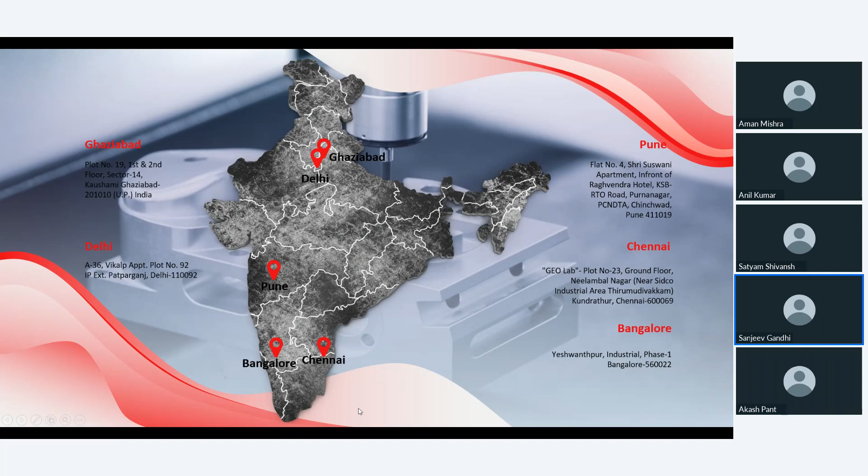Satyam, go next. Like all of you, most of you are present in various cities. Geoinformatics is also present in multiple cities. Our head office is in Ghaziabad. Our legal office is in Delhi for all the legal paperwork. We are located in Pune, Chennai, Bangalore, and Hyderabad. And of course, we also have an office in Jamshedpur.

When we say Geoinformatics, the word geo we have taken from geometry. You all somehow or the other are linked with geometry. Some of you are linked with robo applications, some with material handling, some with machine building. Most of you know geometry or are involved with geometry. Our organization is heavily involved with inspection, reverse engineering, and automation using laser profilers.

Whatever we are doing in our country, we are doing in collaboration with our foreign partners. Today, for the next full hour, we are spending the entire time talking only about a product from LMI Technology. In fact, my team member Peter from Canada is also present in this webinar, and he will assist us in between, answering some of your questions if we can't. Go next.

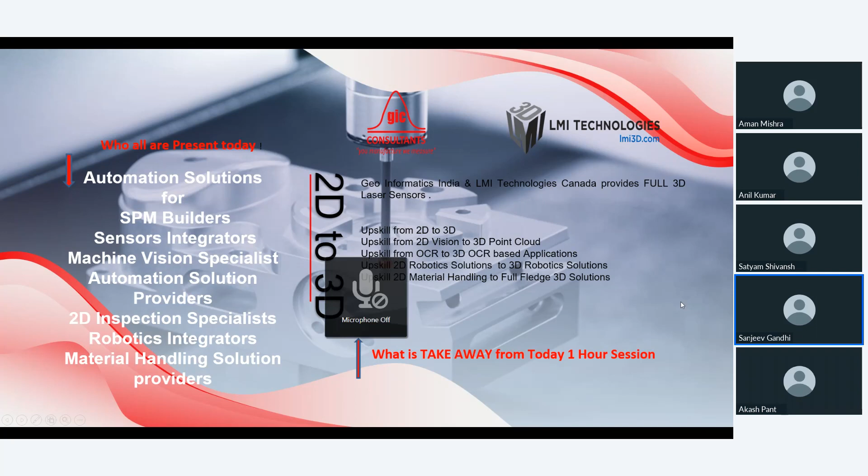What are the takeaways from this one hour session? Just in short, today we want to upskill all of us, including us, from 2D to 3D. You guys know 2D very well. After this one hour, I am very sure we will be talking a lot on 3D - whether it's vision, OCR, robotic handling applications, or material handling applications. Cameras, which are very common and most of you are familiar with, can handle some applications. For example, you can do OCR every day, but how about 3D OCR? Having OCR with depth can be done with the help of sensors. How about material handling, where not only the volume calculation is done, but also the numbers are counted, and whether the total number of parts are there or not can be calculated by 3D sensors. So today, after one hour, I guess we will be on the same page, migrating from 2D to 3D.

Once again, all my next slides are courtesy of LMI. LMI Technology is a Canadian company. We'll be showing you a 5 minute video immediately after that, which introduces you to the complete LMI solutions as a product line, as a solution provider. And Geoinformatics is one of the partners of LMI Technology.

So we'll be presenting about LMI Technologies. This is the story of LMI Technologies, the global leader in 3D scanning and inspection. LMI is a company of passionate, innovative, and dedicated machine vision professionals whose factory-smart 3D sensors and supporting technologies enable the measurement of shape for inline scanning, measurement, and inspection in a wide range of manufacturing applications. Based out of our headquarters and manufacturing hub in Burnaby, British Columbia, Canada, we have 13 regional offices in 8 different countries and an extensive network of valued partners. We bring more than 40 years of experience in the vision industry, over 100 patents, and 420 employees, with 100% focus on developing the industry's leading smart 3D solutions.

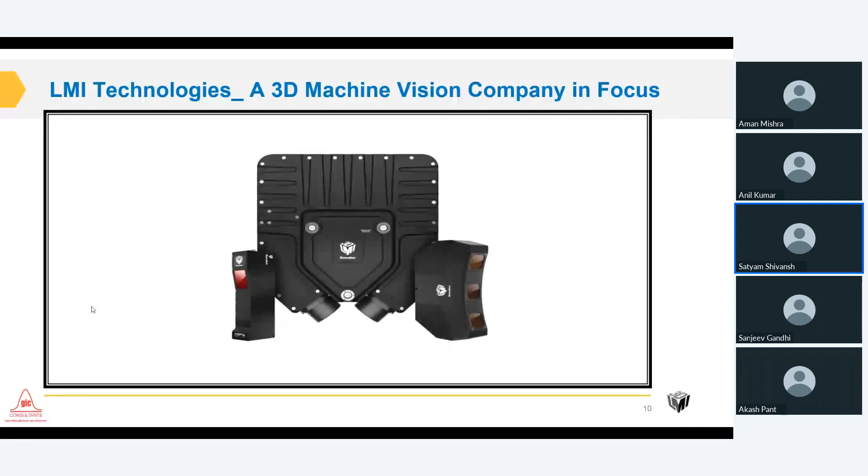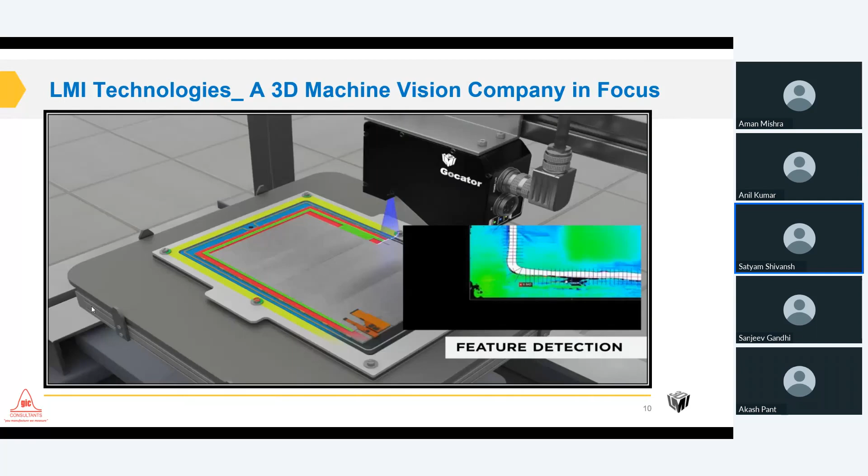Our flagship product is the award-winning Gocator 3D Smart Sensor lineup, which consists of 3 primary technology types: laser triangulation, structured light or fringe projection, and line chromatic confocal imaging. Gocators are not just sensors, they are complete factory-calibrated inspection systems with the ability to make decisions on device and send that information to downstream equipment or databases. Just one 3D Smart sensor can scan, measure, and output volume measurement, detect defects, detect anomalies, detect irregularity, 3D shape inspection, product detection, edge detection, feature position detection, feature detection, orientation detection, height measurement, plane angle measurement, surface roughness, flatness, segmentation, classification, intensity grade, diameter, area, width, length, radius, character reading, presence, absence, and more.

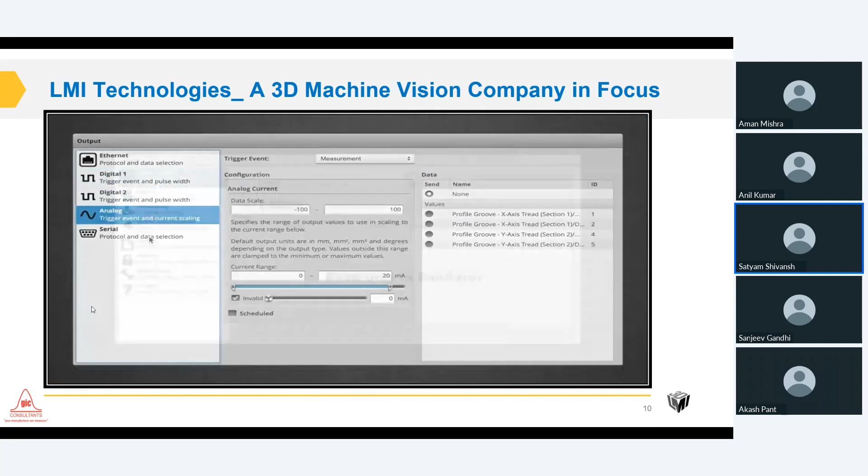All Gocators have a user configurable IP address. Simply type it into a web browser and you can access the device's 160 plus onboard tools, data filters, settings, and everything else you need to quickly get your application running. This no extra cost, built-in functionality makes setup time extremely short. An application that might take days to get running with competing sensors takes only hours with Gocator.

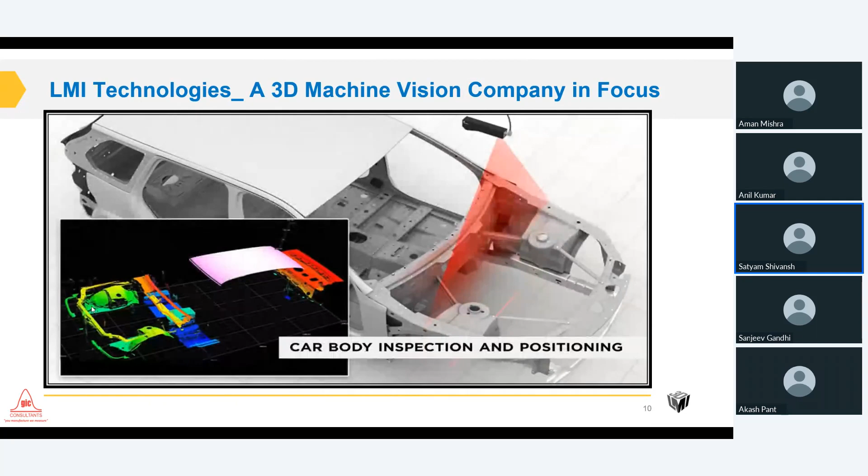LMI offers a wide selection of sensors to fit a wide range of applications. Our Gocator 2600 sensors generate 4,200 points per profile and achieve X resolutions up to 2.5 micrometers for detecting tiny defects in precision manufactured parts. Our 2490 has a 2-meter wide field of view, making it a one-of-a-kind sensor for applications like car body inspection or wide conveyor belt scanning. Our G3 snapshot sensors are relied on for all types of vision

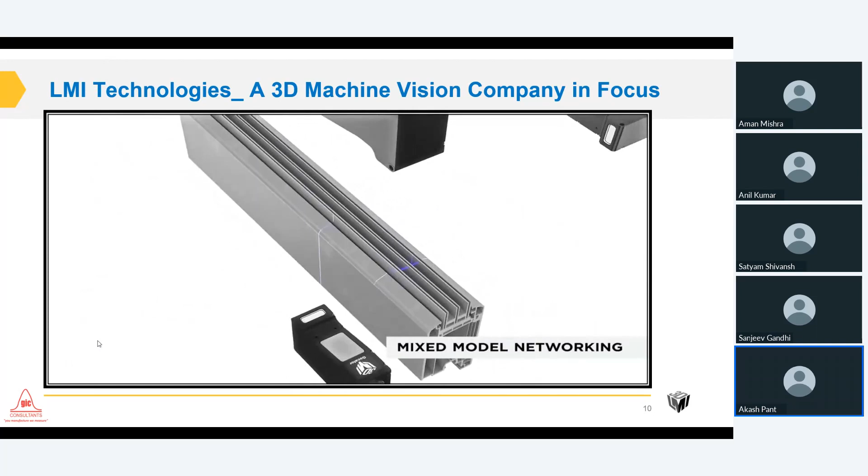Degree scan of a cylinder, it is audible now.

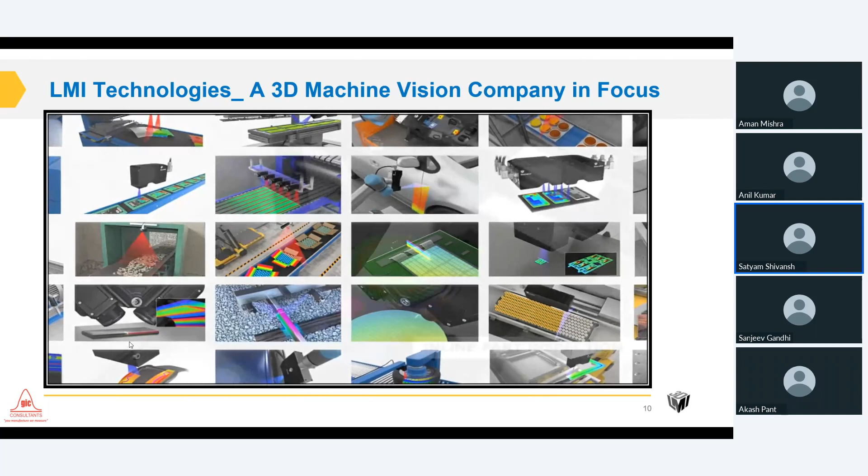LMI's technical team is exceptional at providing reliable and fast customer support. We even offer live training workshops to get you familiarized with Gocator's onboard tools and user interface. With easy robot integration, a comprehensive SDK for advanced users, sensor inspection rates that reach up to 10 kilohertz for line profiler and up to 16 kilohertz for line confocal sensors, and best-in-class performance on challenging materials, LMI has built Gocators to be as smart, flexible, and simple to use as possible. These smart sensor benefits introduce 3D inspection into many manufacturing applications, including inline part inspection, parcel dimensioning, food process optimization, robotic pick and place, EV battery inspection, tire sidewall and tread inspection, road and rail inspection, wood scanning and optimization, semiconductor wafer inspection, multi-layered cell phone glass inspection, and more.

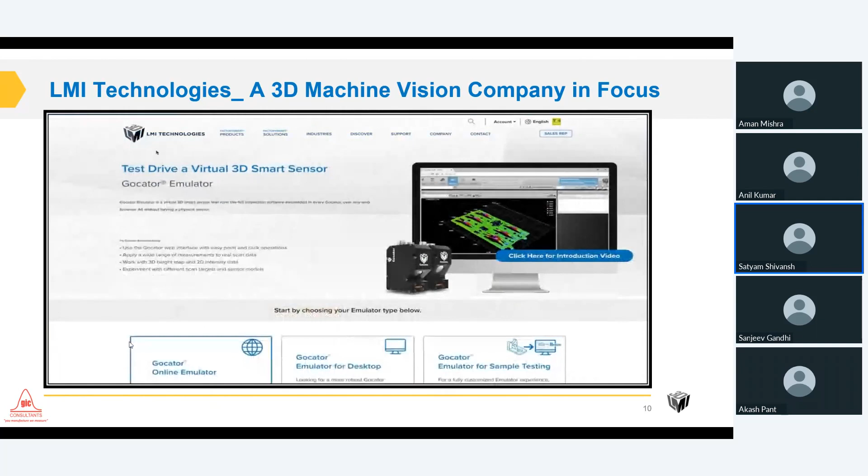And now with our Factory Smart AI Solutions service, customers can get a turnkey solution to deploy the added power of deep learning-based image inspection to their production processes. If you would like to learn more about LMI Technologies or how Gocator can be used for your application, feel free to reach out to us through the Contacts tab at lmi3d.com.

Satyam? Yeah, this is... So as we saw, all this was about LMI Technologies. So we sell LMI through us. We are providing 3D laser profilers or 3D smart sensors.

So first, I would like to talk about how these 3D sensors are much better than 2D vision cameras or 2D measurement systems. So let us compare. When we talk about a 2D measurement system or 2D vision systems, they are not calibrated, they are not pre-calibrated sensors. You cannot simply take the camera out and use it for any kind of measurement related application without doing the calibration. These 3D sensors, however, are pre-calibrated sensors and are ready to use right out of the box.

When we use 2D measurement systems, broadly implemented, we are either using PC-based systems where we use industrial cameras with their own software for doing inspections, or some of the smart cameras also out there. Some of the techniques used for inspection and measurement are pattern matching, edge detection, blob analysis, and a variety of other tools developed by vendors.

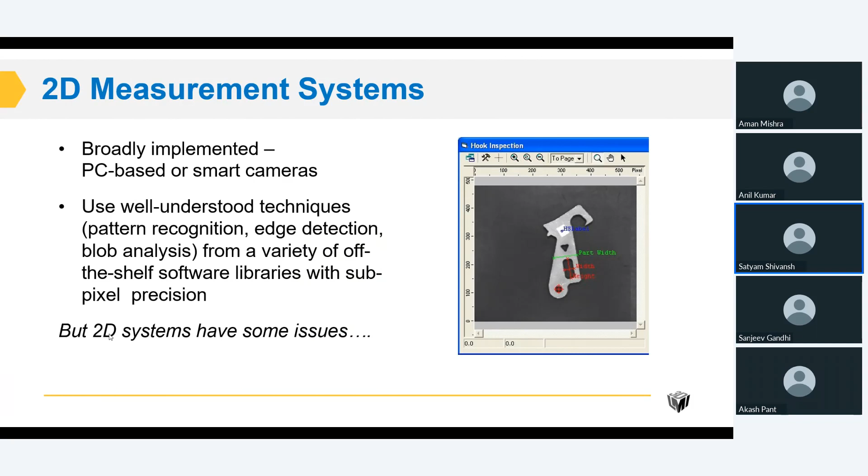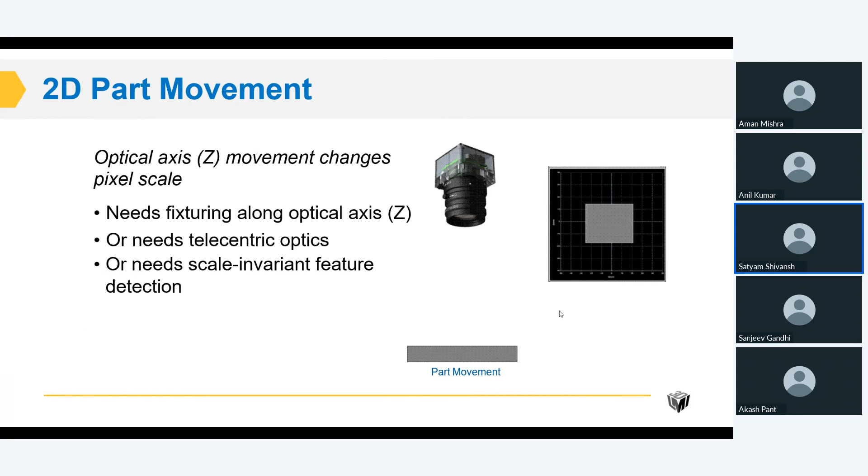Going to the next point, part movement. If there's any height variation in the part, up to a certain level you can easily compensate with the camera. But if the height changes dramatically, you have to use either a telecentric lens or move the camera up and down. To overcome this, with the help of 3D sensors, this issue is entirely removed.

A 3D sensor is calibrated throughout the volume, having its own measurement volume, or measurement range. As far as the part is underneath the measurement range, which is very large compared to 2D vision systems, that doesn't affect anything - we don't have to move the sensor up and down or anywhere. We can simply put any part anywhere within the sensor's measurement volume and measure it. For targeting precision, we can use calibrated targets to easily optimize it.

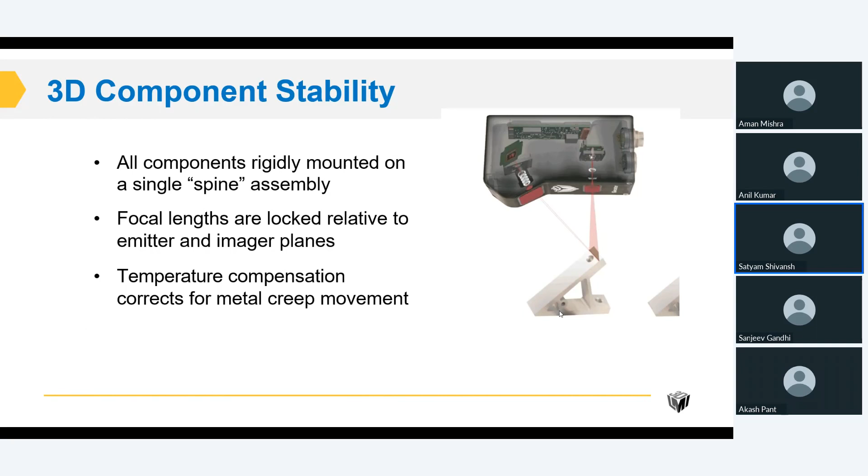Talking about stability: with 2D vision systems, any instability of the component, like vibrations and temperature changes, affects the vision cameras. With 3D sensors, all components are rigidly mounted in the single spine of the sensor itself. Focal lengths are locked, so no changes occur in the imager and emitter planes. Temperature compensation and metal creep movements are also handled up to a certain level inside 3D systems.

So how are these 3D sensors much better than 2D vision cameras? We get rich data acquisition - we're talking about point cloud data, which we get throughout the laser. As a result, we're able to get shape features, object flatness, volume, and we can measure surface angle. All these things we're able to measure with 3D sensors.

Talking about measurement stability, these 3D sensors are much more stable when doing measurements. This is because the focal lengths are fixed, as we saw earlier, temperature compensation is present, and correcting movements with the help of a scan target at start allow us to compensate. These sensors are much more repeatable compared to 2D vision cameras in measurements. Since the object location from the sensors is automatically compensated, the objects can move anywhere within the field of view of the sensor and still result in the same result.

For example, let's say the part is above a certain height threshold from the conveyor system, like 5mm or 10mm, and at that time we scan a particular height and get 5.5mm, suppose. After a certain point, if the conveyor belt has shifted a little bit, like 1mm or 2mm, even then the result will remain the same. It will not affect the measurement or the repeatability.

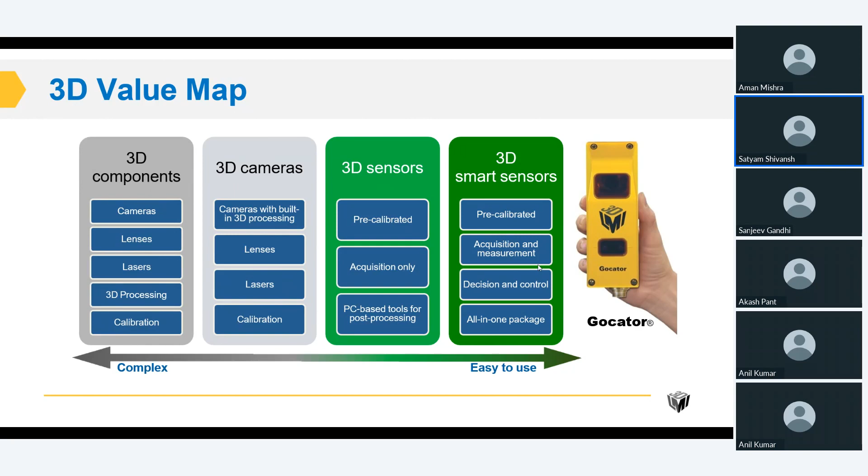So talking more about the 3D technologies, how we do this 3D scanning and inspection. The 3D smart sensors are an all-in-one package that can do the 3D scanning, the measurement, and the pass and fail decision, all with the sensor.

Our smart sensor is for inline 100% scanning inspection across a broad range of markets, from small field of view to large field of views. With these sensors, we can achieve automation, optimization of quality control, and deliver Industry 4.0 data directly to a learning system as well.

Now we are talking about the Gocator. It's the same idea: scanning, measurement, and control for material optimization at high speed during the production process.

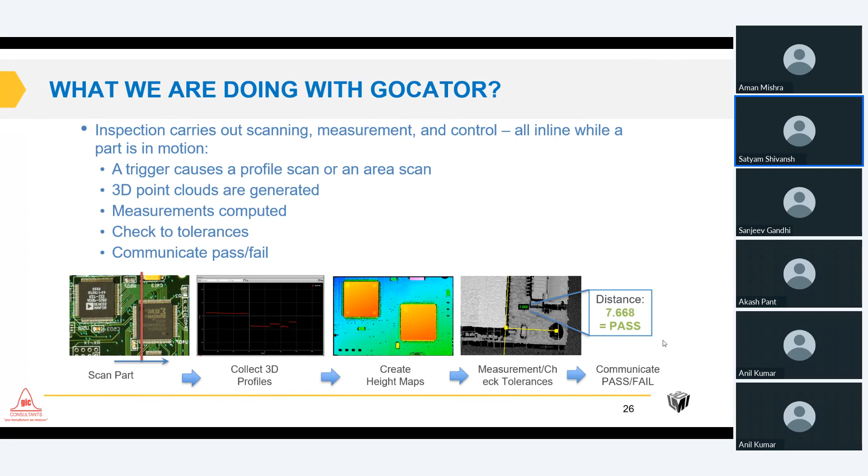We call them 3D height maps, and on these you can easily do measurements, and enter tolerance values, like the tolerance limit shown here at 7.668. Based on that, it will pass, and the sensor will communicate the pass and fail results directly to your controller, robot, or ejection system. On the basis of that simple trigger, you can reject or accept a particular part and give an alarm too.

Towards 100% quality control -- previously, factories were doing offline article inspection, taking a part to a standard room for inspection, which was a time-consuming process. Then we moved to random part inspection, taking some random parts directly from the conveyor production line to do the inspection.

Now, talking about 100% part inspection, any part coming on a conveyor can be inspected for critical dimensions, any kind of linear dimension you want to measure -- the sensors are easily able to do that linear dimension inspection.

So I will just play a video on why we should choose the Gocator sensor.

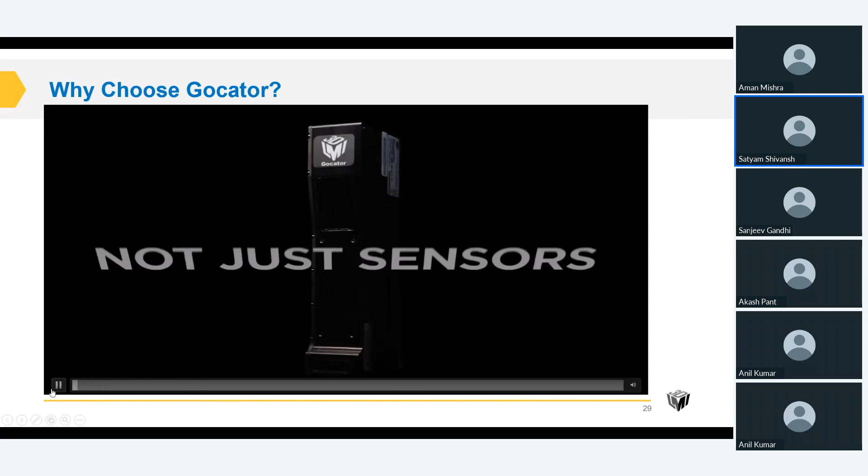Gocators are not just sensors. They are complete factory-calibrated inspection systems with the ability to make decisions on device and send that information to downstream equipment or databases. Just one 3D sensor can scan, measure, and output product volume, defects, anomalies, irregularities, 3D shape data, edge detection, feature position, height, radius, orientation, plane angle, surface roughness, flatness, segmentation, classification, intensity grade, diameter, area, width, length, character reading, presence, absence, and more.

All Gocators have a default IP address. Type it into a web browser and access the device's 150 plus onboard tools, data filters, settings, and everything else you need to quickly get your application up and running. This no extra cost built-in functionality makes setup time extremely short. An application that might take days to get running with a competing sensor takes only hours with Gocator.

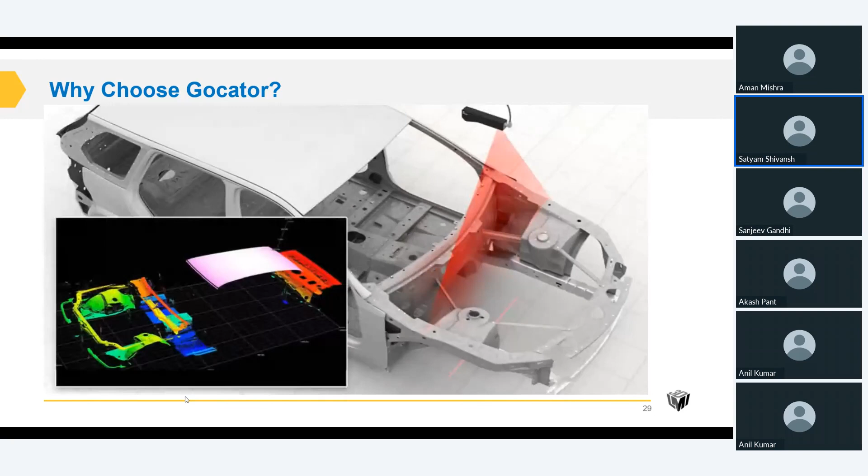LMI has a wide range of sensors to fit a wide range of applications. Our 2490, for example, has a 6.5 feet wide field of view, making it a one-of-a-kind sensor for applications like car body inspection or wide belt scanning. Our smallest field of view sensors can find tiny defects in electronics, even multiple layers of a camera lens assembly.

With our G5 technology and over 40 years of experience building three-dimensional sensors, LMI's technical team is exceptional at providing reliable and fast customer support. We even offer free live training workshops to get you familiarized with our onboard tools and user interface.

Sometimes our customers need more resolution or a more complete view of an object for their application. Multiple Gocator sensors can easily be linked together to create a wide scan area or provide a more detailed view of an object. Gocator software makes this easy. Just select the sensor layout you are using, set up an aligning tool, and the software does all the rest of the work so that you can quickly start making metrology-grade measurements.

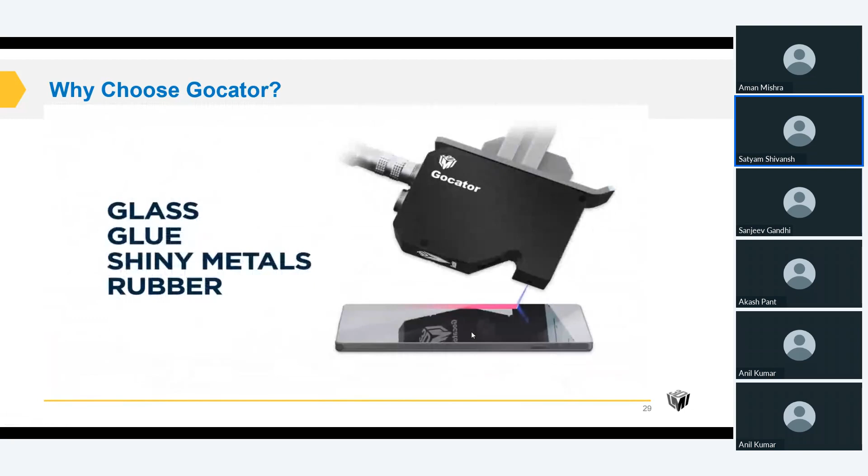With easy robot integration, a comprehensive SDK for advanced users, sensor inspection rates that reach up to 10 kilohertz, and best-in-class performance on challenging materials, LMI has built Gocators to be as useful and simple to use as possible.

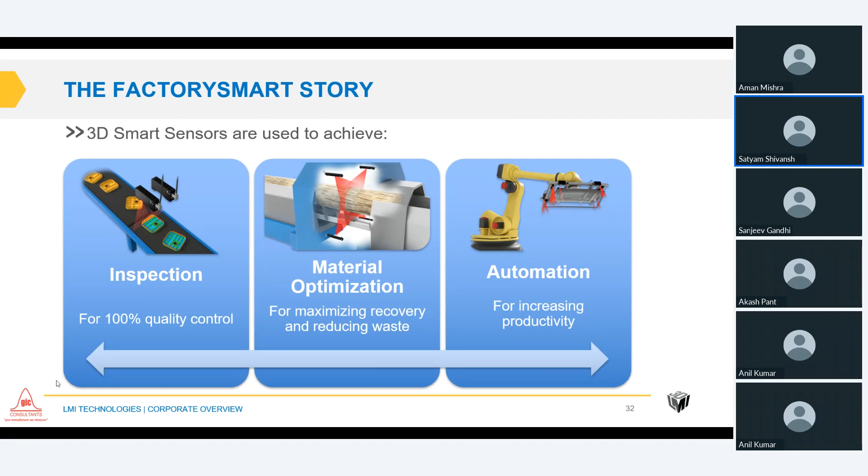So you can simply connect. All about Factory Smart means you can simply connect it anywhere and talk to any kind of system. It's easily scalable. You can easily mold the Gocator sensors' inbuilt tools to any kind of application up to your liking, and it is smart. It can make its decision on its own.

So this is the same scanning of the parts, giving you the results. You can see here the dimensions are being measured, and according to that, the alarm is being generated.

This is material optimization, scanning of the part, giving the coordinates to a cutter, cutting it in equally divided shape sizes. And the last is automation, guiding of the robots for this. This is a roof placement kind of application for these kind of applications.

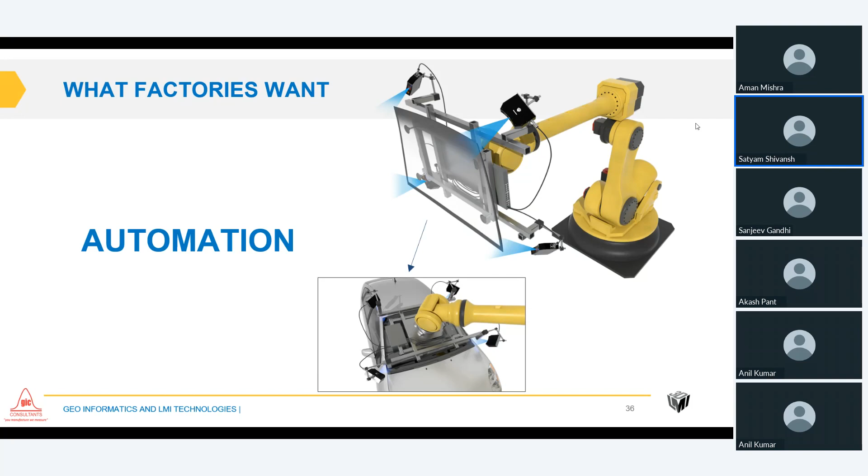So with the Gocator sensors we have two kinds of technologies on which the sensor is working. The first is laser triangulation technology, in which any part can be moved in a running condition and the sensor is able to scan it completely on the top surface and generate a 3D point cloud data. The second is structured light technology, where the part comes, stops for a moment, the sensor takes a snap, and we get a 3D point cloud data generated.

As you can see, this is how the sensor operates. The parts move underneath the sensor, and the sensor scans it and generates a 3D laser profile.

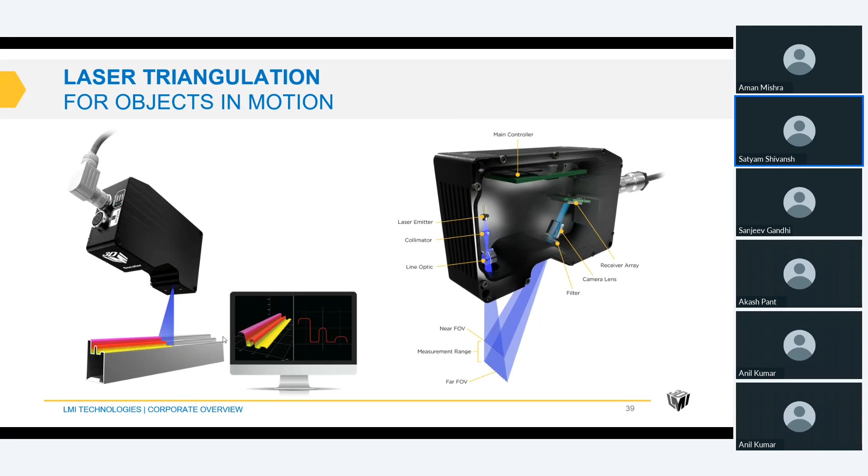So the Gocator sensor is more than just a sensor. The sensor acquires the 2D data, that is the intensity image, as well along with the 3D data acquisition. It does the measurement also. It does the control. It has all the controlling features of the sensor built inside, and the tools are customizable according to the application. And this is all in a web-based interface.

So we are having three categories of sensors. One is a point, one is a line, and one is a snapshot. So this video will explain what all the categories are there and how they are being used.

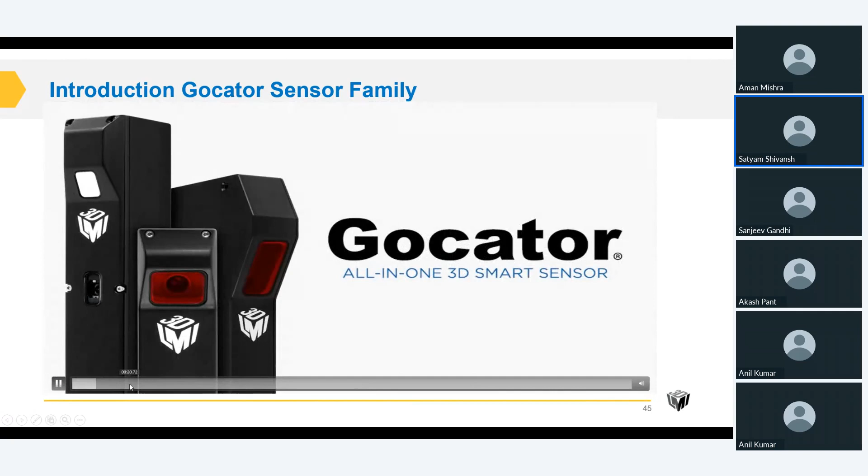Presenting Gocator from LMI Technologies. Our Gocator all-in-one 3D smart sensors are trusted worldwide for automated inline inspection and material optimization. As all-in-one solutions, Gocator smart sensors combine 3D scanning, measurement, and control in a single device.

Advanced web technologies deliver a powerful user interface to any web browser with no external PCs or controllers required. This makes Gocator easy to integrate into existing inspection systems, therefore minimizing system costs and maximizing product quality and throughput by automatically executing pass-fail controls.

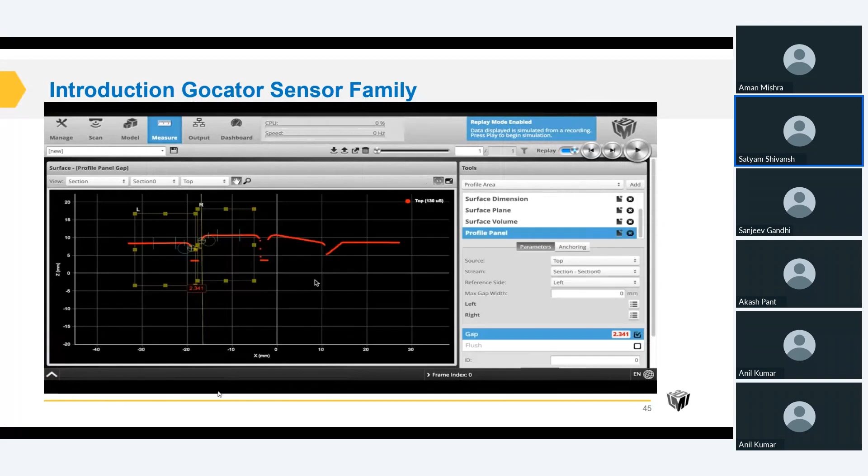All GoCaters are factory pre-calibrated, so users can immediately set up the sensor out of the box and be confident that the measurements are mapped to real-world coordinates. It's simple to point it at an object and instantly from a web browser see a complete profile or 3D point cloud, depending on the Gocator model. We can also easily configure functions such as exposure, triggering logic, and output communication methods directly from the web interface.

There are three types of Gocator sensors to fit your quality control inspection needs or your specific application. First, single-point profile sensors can measure 3D thickness, height, and surface roughness by combining single points at very high speeds of up to 32,000 Hz to create a profile.

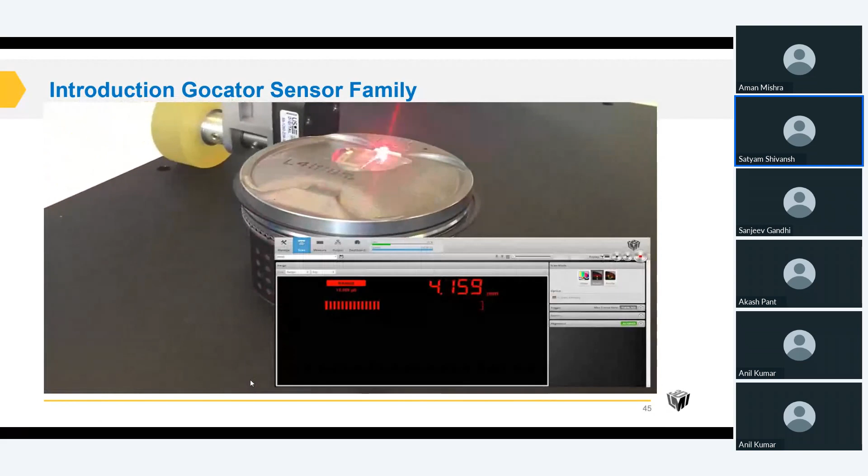Next, line profile sensors can rapidly create cross-sectional profiles for measuring features of an object surface. And by moving the object under the laser line or through the movement of a sensor, the multiple profiles can be combined into a full 3D shape for surface or volumetric analysis.

Finally, structured light snapshot sensors generate high-density 3D data models of a stationary target using stereo cameras and fringe projection.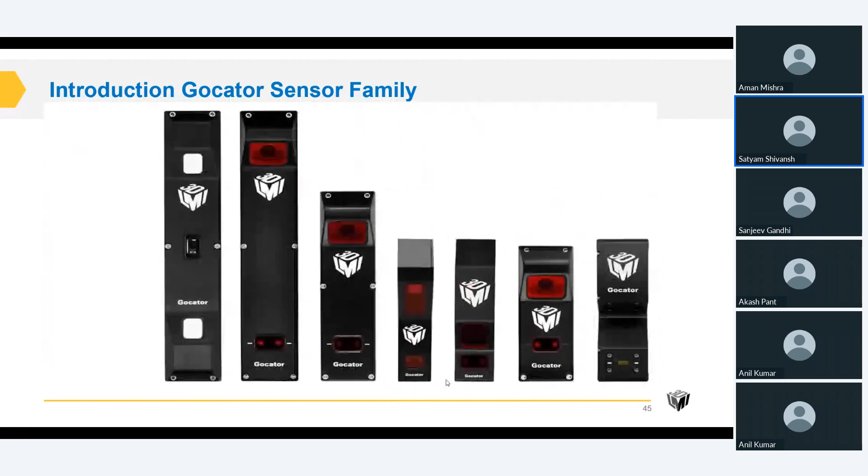Additionally, the diverse range of Gocator models within each sensor type are available to meet your desired speed, resolution, and field of view requirements. Setting up Gocator is fast and easy. Use your favorite web browser to access and control Gocator with drag and drop functionality. The best thing is that no programming knowledge is required to get started.

Gocator's built-in tools provide a full suite of measurement capabilities to solve a wide range of inspection challenges. Calculate widths, heights, angles, radiuses, and a multitude of combinations to measure exactly what you're looking to inspect.

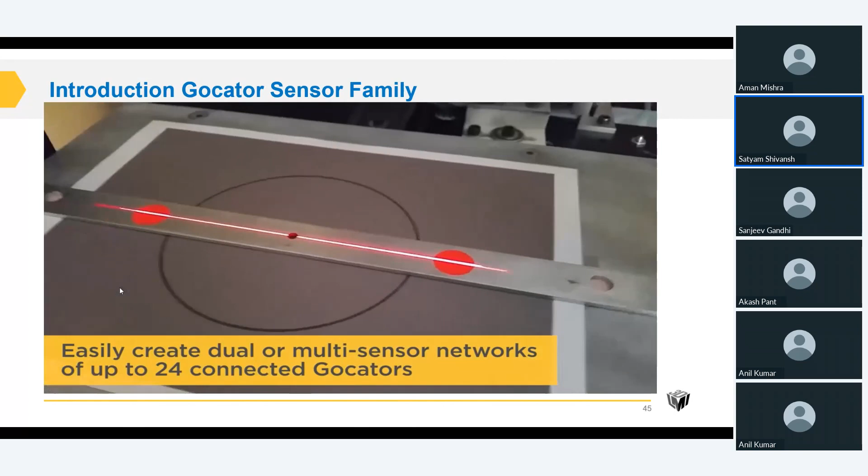Gocator is more than just a sensor. There's a complete inspection ecosystem inside every Gocator. Need a wider or better view? Easily create dual or multi-sensor networks of up to 24 seamlessly connected Gocators to increase the field of view and scan coverage without compromising quality. Plus, sensor synchronization is automatic and simple to manage.

Customize Gocator with LMI's Gocator Development Kit. Gain complete control to manage and customize measurement tools to meet your application needs. Gocator makes 3D scanning and inspection easy. Start thinking of Gocator today to solve your quality control needs.

So this is how I showed there were three kinds of categories and how these 3D sensors, three types of sensors, can be used for different applications. We'll be moving on to that.

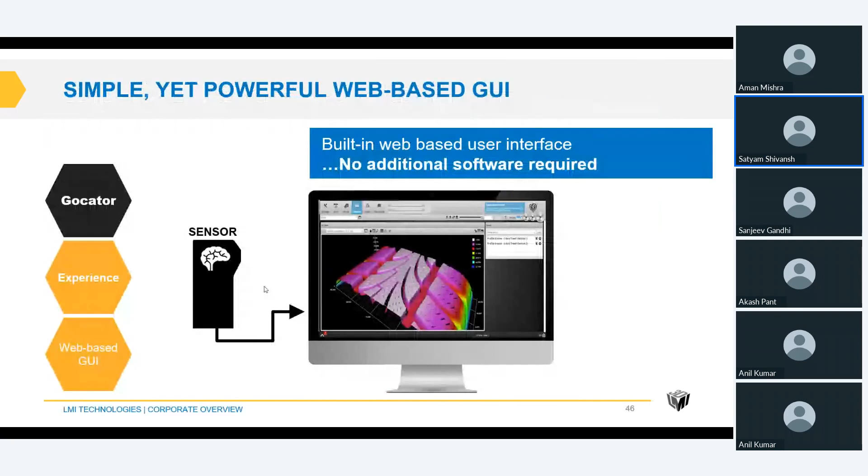These are some of the tools which are there inside the Gocator web interface. These are the full suite. These are some of the tools which can be used in the profile mode, like the profile category. And then we have the tools which can be used on the 3D point cloud data or surface data.

These sensors are easily flexible. We can add these sensors to a robot for multiple applications.

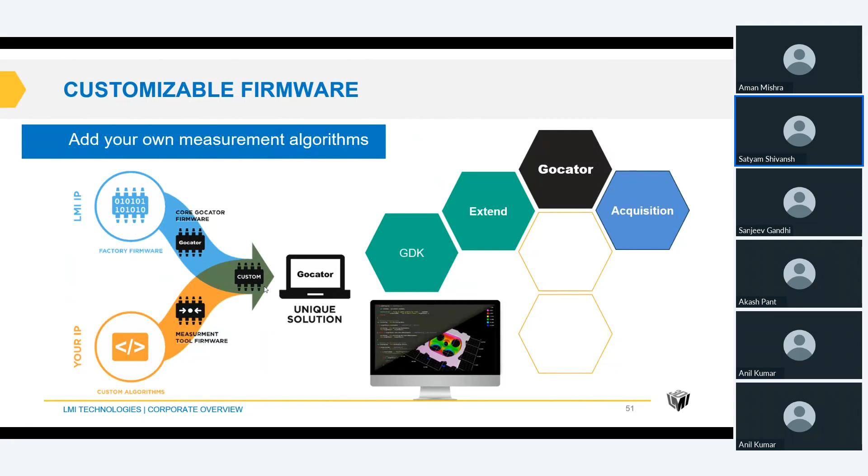As previously told, we are able to build customized solutions using Gocator sensors with multiple sensor networking. When using a single sensor with a fixed field of view, your resolution is quite good, but when you go for a large field of view, you also want high resolution. In that case, you have to use multiple sensors, but coordinating those sensors in a single coordinate system is quite difficult.

The advantage of the multiple sensor networking that LMI Gocator sensor has is that it's easily calibrated. You can use these sensors for multiple categories of views, like a wide view where you want precise resolution with a wide range of field of view. With a precise 10 mm sensor, you can multiply it by 10 sensors together to get a 100 mm FOV and achieve the same resolution as a single 10 mm FOV sensor. These sensors can be used for multiple sizes of objects. For small size objects in the electronics industry, we're talking about circuit board inspection, electronic component inspection, smartphones, tablets, wearables, and any consumer electronic products, giving the best results.

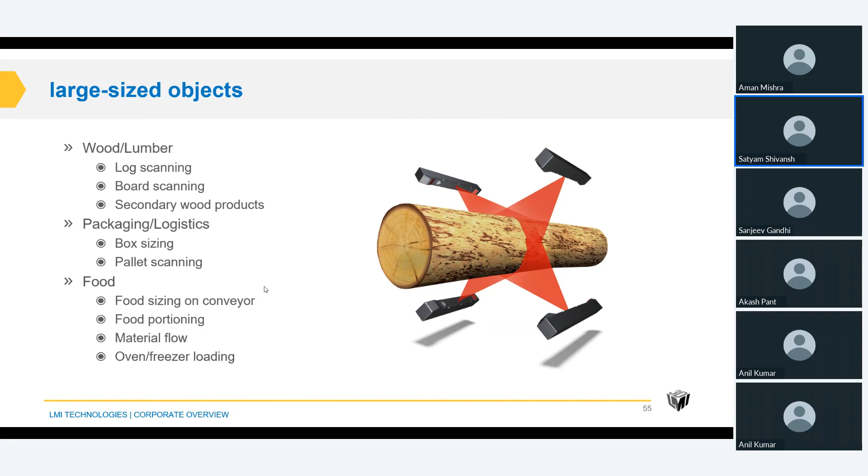Talking about large size objects, like wooden lumber in packaging and logistics, box sizing, pallet scanning, food sizing on the conveyor, material flow, and oven or freezer loading. All these categories can be overcome with the help of Gocator sensors. Gocator has a smallest FOV of 10 mm to a largest FOV of 2 meters, with very high resolution.

This is about the Gocator software, how the software looks. It's a simple web interface where you call the IP of the sensor and the complete web interface opens up. All the 2D and 3D measurement tools are available, and you can get outputs from Gocator in the form of Profinet, Ethernet IP, Modbus TCP, ASCII, and digital outputs in the form of serial outputs as well.

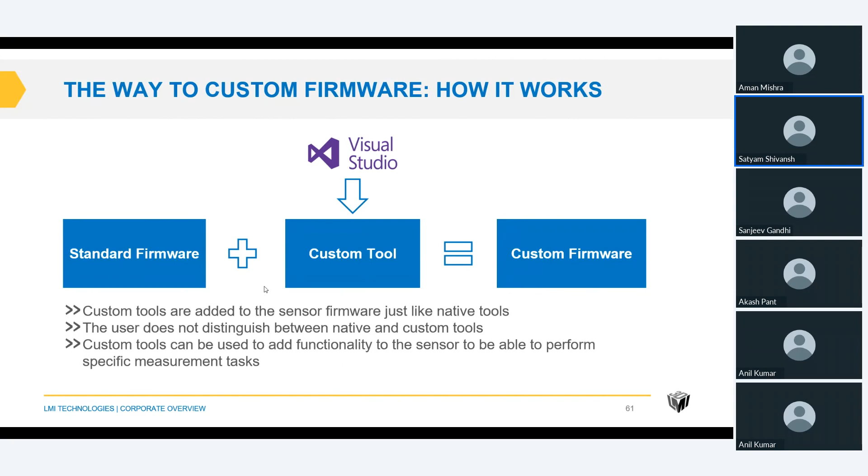You can easily customize custom tools with the help of Visual Studio. By giving you the SDK, you can design your own tools and program. It's easy to use the Gocator development kit to write a program—we have examples you can utilize. The Gocator development kit benefits building a customized application with your own software and our sensors. You can develop, build, and debug measurement tools with GDK, then upload them into the sensor.

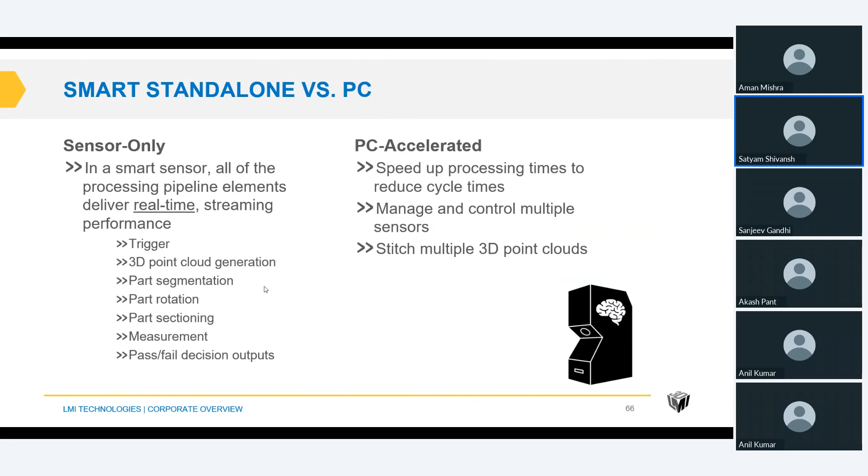Talking about smart standalone sensor versus PC: when using the sensor only, we can give the trigger, get 3D point cloud generation, do part segmentation, part rotation, part sectioning, and more. We can even accelerate the sensor with a PC or offline accelerator, which we call GoMax. If the sensor has a delay because of high speed movement or high data processing, we can accelerate it using the PC and external tools.

Integration with robots—talking about how Gocator can be integrated with the robot for quality inspection and enhanced material optimization.

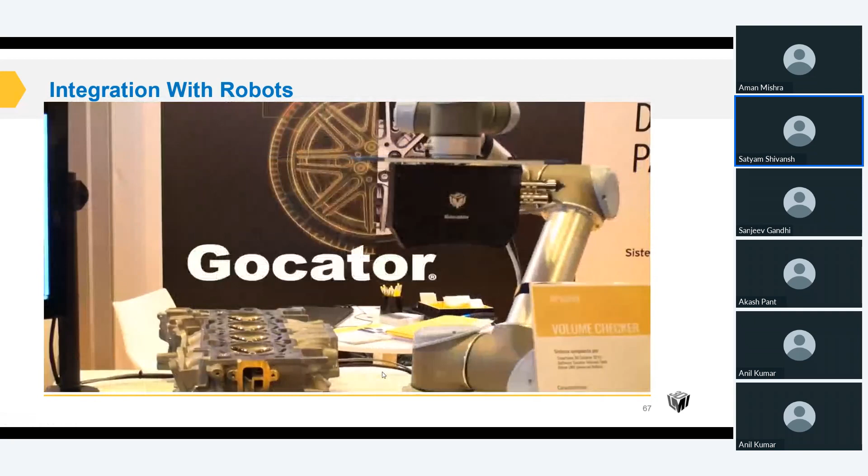Smart manufacturing, industrial Internet of Things, and Industry 4.0 aren't just buzzwords—they're ingrained into our way of thinking and the products we produce. To help place the smart factories of tomorrow in reach today, we are pleased to showcase Gocator as our answer. Gocator is an easy-to-use, flexible design that delivers high-performance machine vision with seamless data communication so your factory can operate more efficiently and profitably.

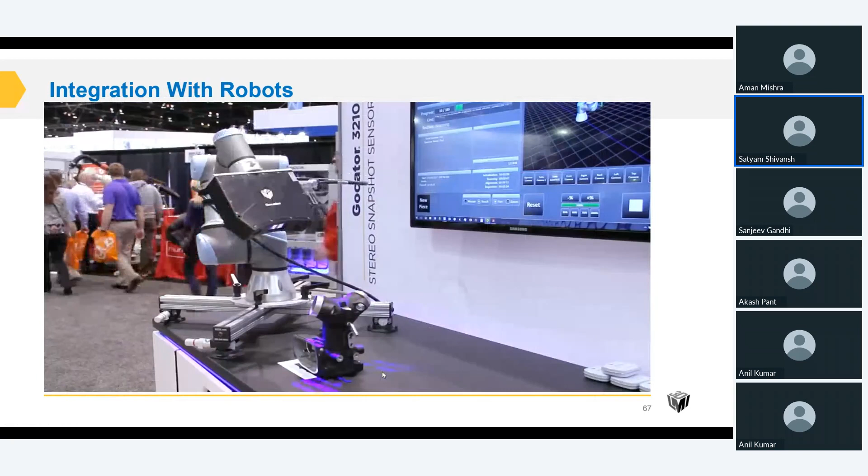We have two trusted 3D technologies for your smart factory applications: laser profilers and snapshot sensors. Our 3D smart sensors can also report measurement results, monitor trends, or network with other machinery to exchange or combine data.

Talking about the next best thing the Gocator sensor is having is with the UR robot. With the UR robot, we have a built-in plugin. With the help of that plugin, you are easily able to do hand-eye calibration with the UR robot and the Gocator sensors. After doing the hand-eye calibration, whenever the sensor scans any part within the field of view

or within the measurement volume range of the sensor, it gets the coordinates X, Y, Z, roll, pitch, and yaw with the help of a tool called Feature Robot Pose. We are able to send those values directly to the robot, and those coordinates are directly from the robot base, from the 0,0, from where the robot is standing. So we do not have to give any offsets, which we have to do when calibrating with a camera or with another sensor brand. This is the major advantage that the Gocator sensor has with the help of a UR robot.

I'll just show you a quick video of how it is being done, so that you can get a better idea.

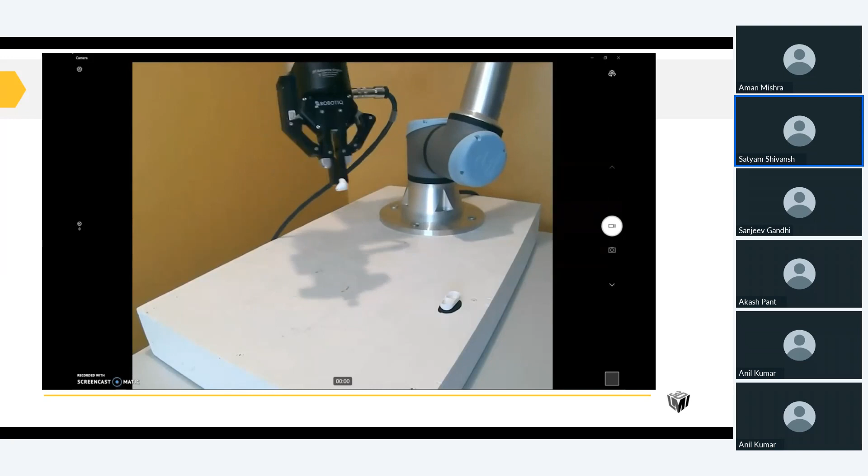Welcome to this brief demo showing how to use an LMI 3D machine vision system for true 3D pick and place with a UR robot. We're going to be scanning an earbud with a Gocator laser line profiler, accurately locating the stem of that part, and then communicating that location to a UR5e robot so we can pick it and put it perfectly inside the earbud case.

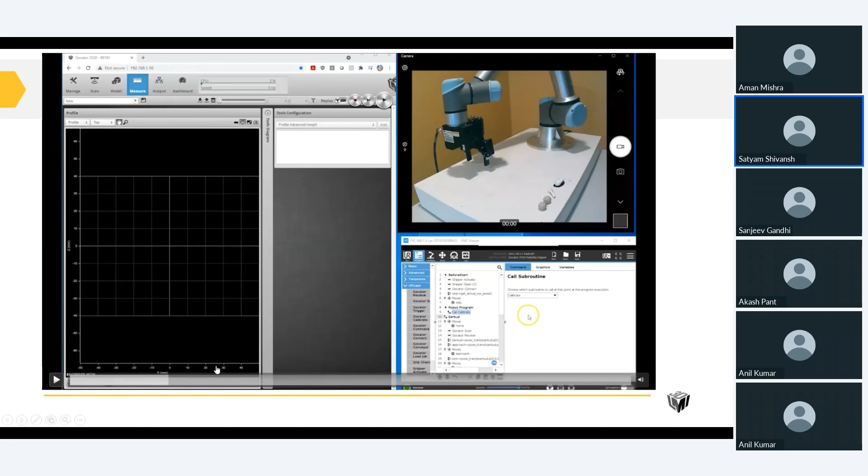In the upper right-hand corner we have our camera view, and our teach pendant in the lower right. From here you can see how the Gocator is mounted on the UR robot, and we are calling the subroutine on the UR touchpad. This is our Gocator laser line profiler.

Before we do any pick and place on a flat plane, we're going to run a calibration routine that generates a transformation matrix. Basically what we are doing here is using a ball bar. We are going to scan that ball bar with the help of the 3D laser sensor, and when the ball bar is scanned, all the values will be transmitted to the UR robot where the Gocator is.

So that when I send coordinates from my 3D system to the robot, they're going to be meaningful, and the robot is going to be able to move to that point and take our part.

Here we have simply loaded a job file which comes with the plugin with the sensor, containing a single surface ball bar tool already created that's going to look for a ball bar. Let's go ahead and run our subroutine. You'll see the laser line profiler scan 8 times and find the ball bar in each of those scans, and I'm going to generate our transformation matrix.

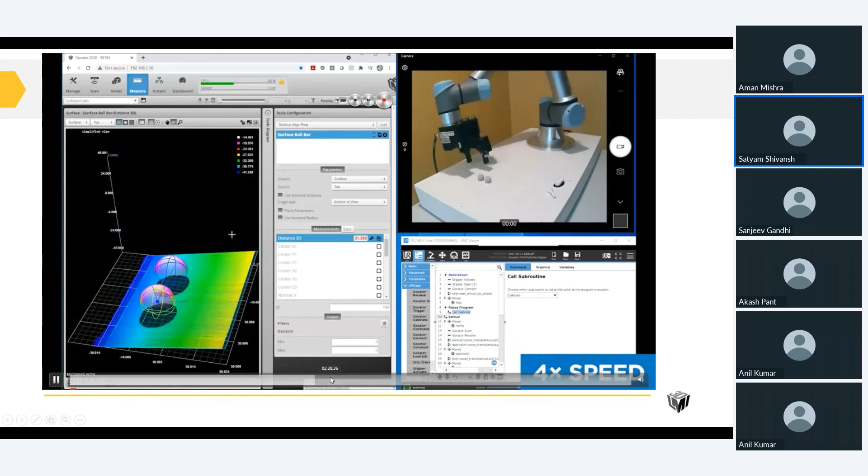Satyam, a bit fast, we need to move. Yeah, sure, I'll just accelerate this video.

So now that the calibration has been done, the subroutine runs on the UR robot side. Here you can see, after doing all the programming on this side for giving the XYZ roll pitch and yaw, on the robot side we just receive that information. Here you can see all the values directly from the 0,0. Whenever the sensor scans, the robot can go pick the part and place it. This is the major advantage that the Gocator sensor and the UR robot plugin is having.

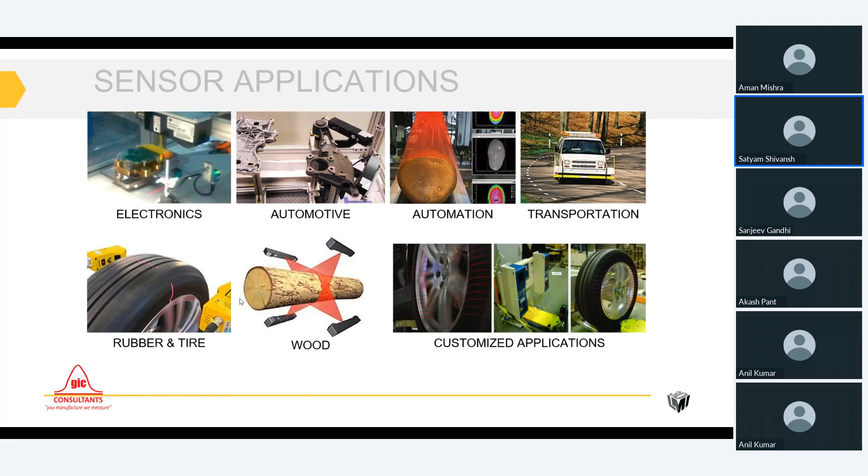Talking about further case studies and moving on to further examples, applications where the sensor can be used include electronics industry, automotive industry, automation, transportation, rubber and tire, wood, and other customized applications depending upon the use case. These are some of the existing customers for the laser sensors and the structured light.

Sensor used is Gocator 2330, again with LabVIEW. Here is another application where we are scanning the same connector pins, the chip pins inspection. This is how it is being done.

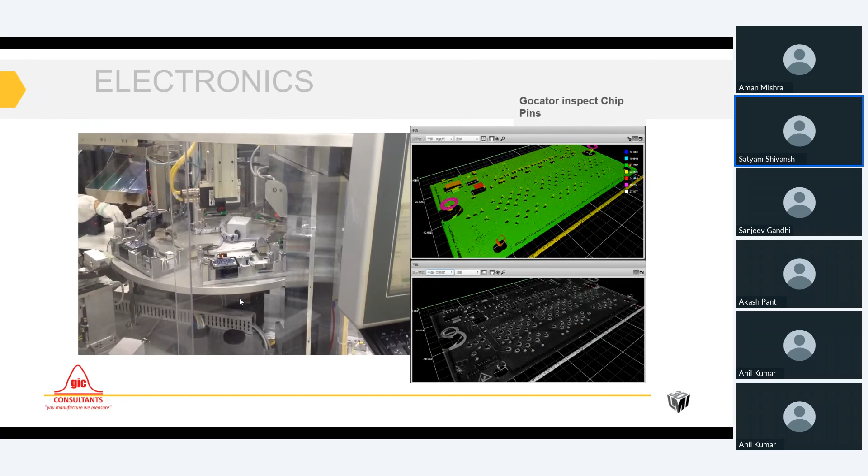Next, we are checking the coplanarity of the chip. The chip size is 9.99 by 9 mm, within a dimension of 100 by 100 mm, so we require plus minus 10 microns. We need to scan the complete part, using the actual plugin available for the Halcon system.

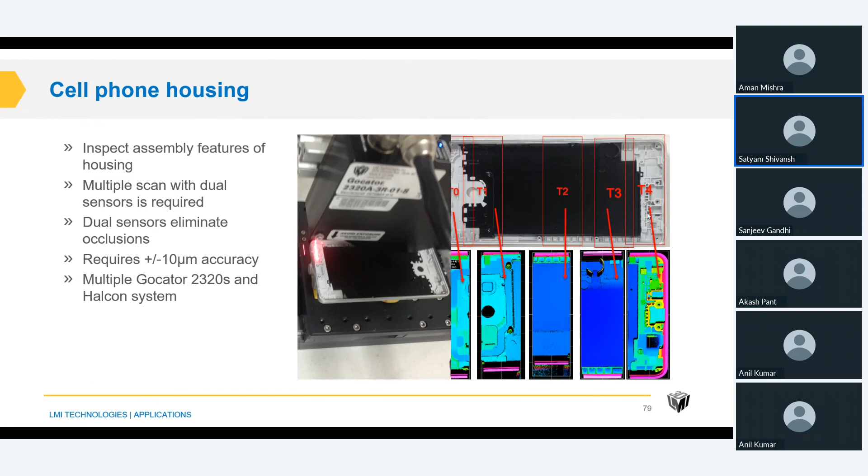Moving to the next application, we need to check SIM card slot height difference. With Z accuracy of 10 microns, we use sensor 2320, again with Halcon for the complete development of the UI, for the electronic industry cell phone housing. Very tight tolerance here, so we use multiple sensors together - T0, T1, T2, T3, and T4 - scanning in 4 different scans to get the results.

And last but not least, solder paste inspection. For EV batteries also, we have a special Gocator sensor. This video is going to explain all the applications in EV batteries where you can use the sensor.

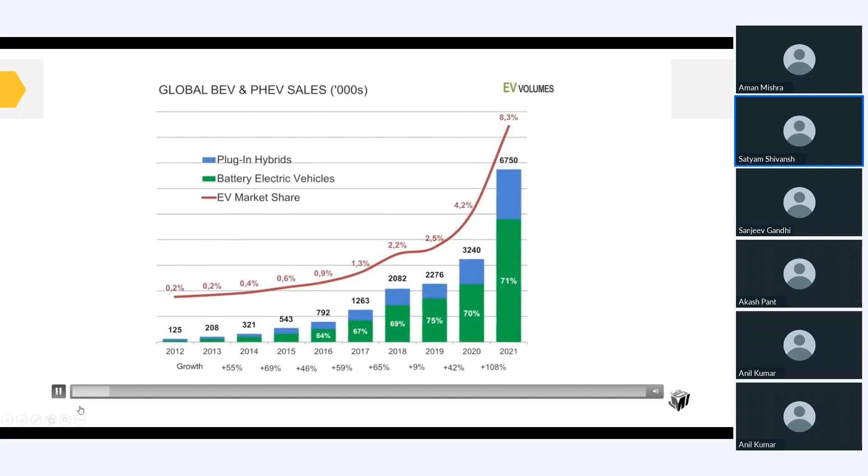Over 6.5 million electric vehicles were sold in 2021, that's 108% more than were sold in 2020. The increase in demand has already permanently changed the EV car manufacturing landscape. Let's move on further.

EV battery manufacturing can be broken up into 4 general steps: electrode manufacturing, cell packaging, cell to module assembly, and module to pack assembly. Gocator 3D sensors and their built-in onboard tools are used in every stage of this process.

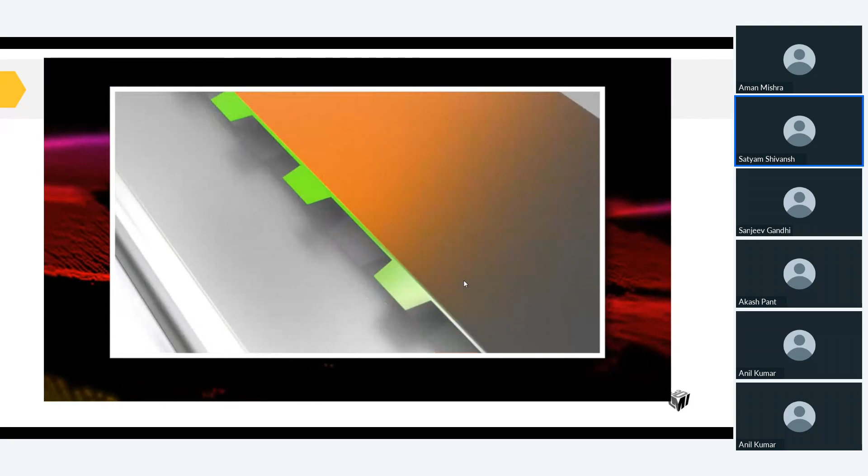Let's look at electrode manufacturing first. During this step, Gocators are used to ensure uniform shape and thickness of the electrode as the slurry is applied. Sensors are also used to measure the distance between tabs on a cell sheet. Tolerances are extremely small for these applications, so high-resolution, small field of view sensors are used.

Two of the most common cell types used in electric vehicles are cylindrical and prismatic. Cylindrical cells are rigorously tested for any dents or scratches on the cell body. Prismatic batteries are first measured for gap and flush along a weld line. After welding, they are inspected again to ensure the weld seam is uniform and within tolerances.

I spoke with James Ma, our technical service manager in Shanghai, to learn more about this application. When we put the materials into the battery cell, we need to seal the lid with a very fine welding process, making sure there's no leakage and no defects on the welding. Otherwise, there will be risk when we put the cell into the car. The dimension of the welding seam is only 3 to 5 millimeters wide, so we picked our high resolution, high speed sensor, the 2520, to do the measurement.

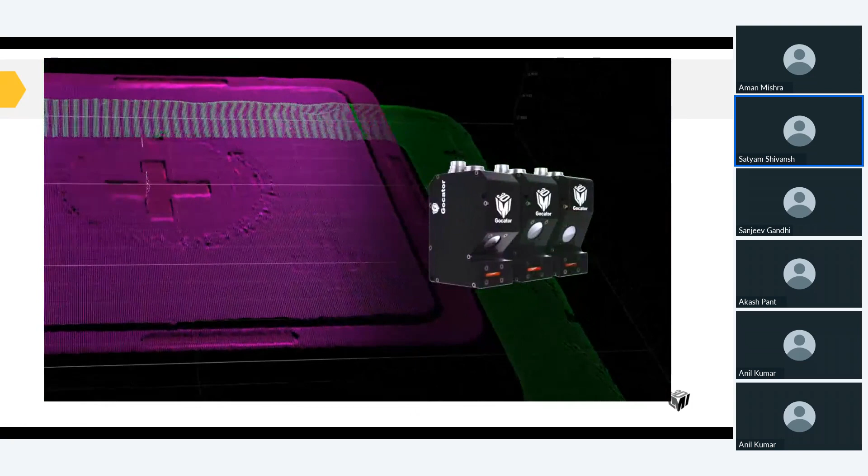For the battery cell, it has a shiny surface, so if you use blue line laser, it has less reflection from these surfaces, so the data quality is better.

When we have a new customer, for example from the EV battery market, we are not only trying to sell them the product we have, we are looking for a long-term partnership. We actually have our engineers go and see what the customer really appreciates. Next, application for module.

4 of them are precisely grouped together, forming a battery module. An example application for module inspection is for sensors to measure the spaces between individual cells. Finally, GoCators are used at the last stage of the process, combining modules into a single battery pack, ready to be installed into a new electric vehicle.

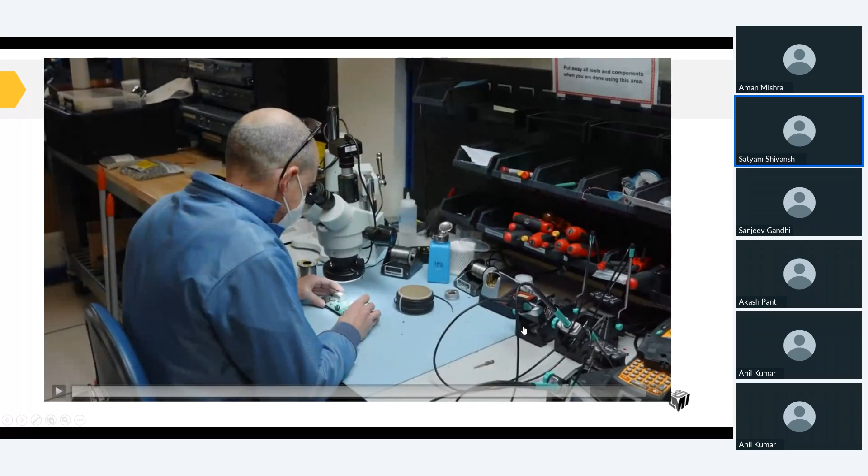EV battery production continues to rapidly grow around the world. So this is how the GoCator sensor can be used in the EV battery sector. Now I'll move on to the automotive sector.

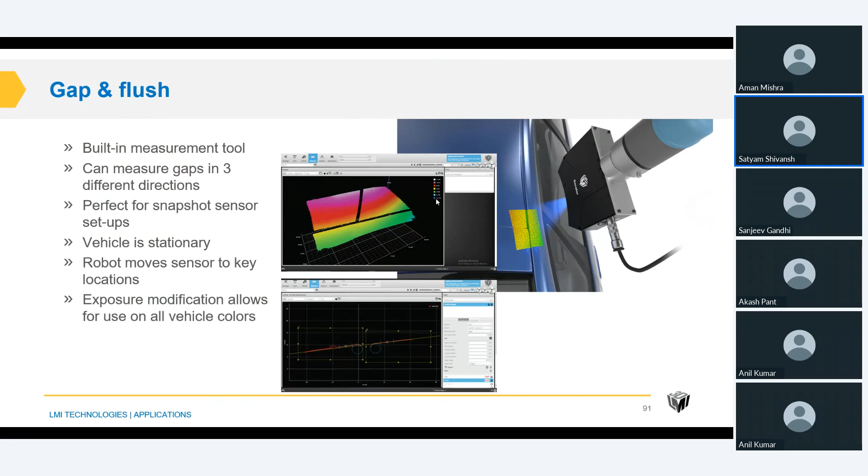Next is the flexible measurement systems. You can see throughout the part which we are doing. Next is the gap and flush inspection with the help of GoCator sensors at different locations mounted on a robot, again with the help of a snapshot sensor. This is how the gap and flush inspection is being done, providing our automotive partners with cutting-edge gap and flush measurement capabilities.

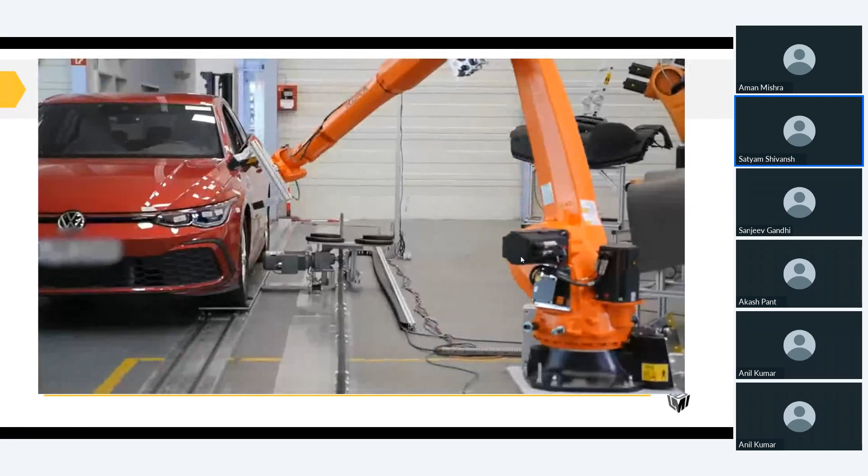For the configuration seen here, we are using one downward-facing, ultra-wide field of view GoCator 2490 to determine the 6 degrees of freedom of the vehicle. That information is relayed to a KUKA robot arm, allowing our buddied Blue Line GoCator 2440s to make detailed gap and flush measurements. Buddied sensors are networked to automatically generate a single, high-accuracy 3D scan of the target. This configuration also solves for any potential occlusions on the scan target. Scanning and inspection happens continuously with no external computing required, all while the vehicle moves down the assembly line.

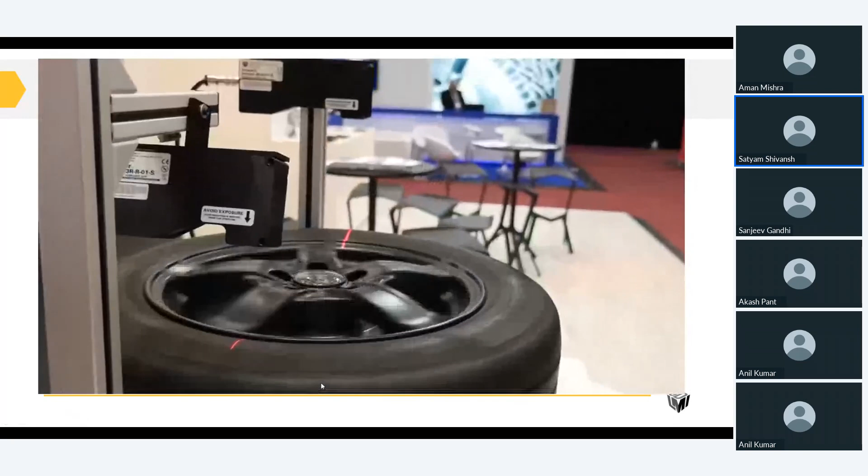Our Blue Line laser sensors are specifically designed to measure shiny or specular surfaces, making them especially suited for gap and flush measurements. Measuring surfaces like headlights, windows, and glossy white or black paint can be a challenge for traditional red line laser sensors, which work better on lower reflectivity or matte surfaces, particularly on fast-moving targets. For specular or shiny surfaces, red laser light becomes distorted, resulting in a speckle effect. In contrast, the shorter wavelength of the blue laser sensor produces much less speckling, resulting in lower noise levels, typically by a factor of 2 to 3 compared to red laser sensors.

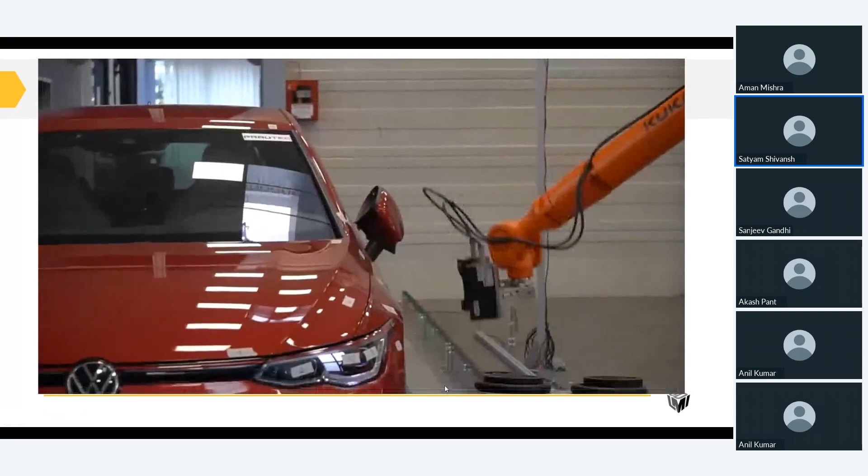Using 2 networked blue laser sensors allows the client to scan deeper into the gap, generating more complete and precise measurement data. The process of combining and aligning multiple sensors is simple with our built-in alignment procedure. With a combined 3D point cloud dataset, we can now do our gap and flush measurements on the sensor in real time. Depending on the surface quality, our system can capture up to 60 measurement points per minute, taking 0.5 to 1 second per measurement point, including evaluation.

These scans are extremely detailed, measuring not only gap distance to the tenth of a millimeter, but also the shape, smoothness, and curvature of the surface. With this data, many measurements, including calculations and pass-fail decisions, are made, allowing for a high level of quality assurance. Every Gocator sensor leaves our factory after undergoing rigorous factory calibration, assuring accurate measurements directly out of the box.

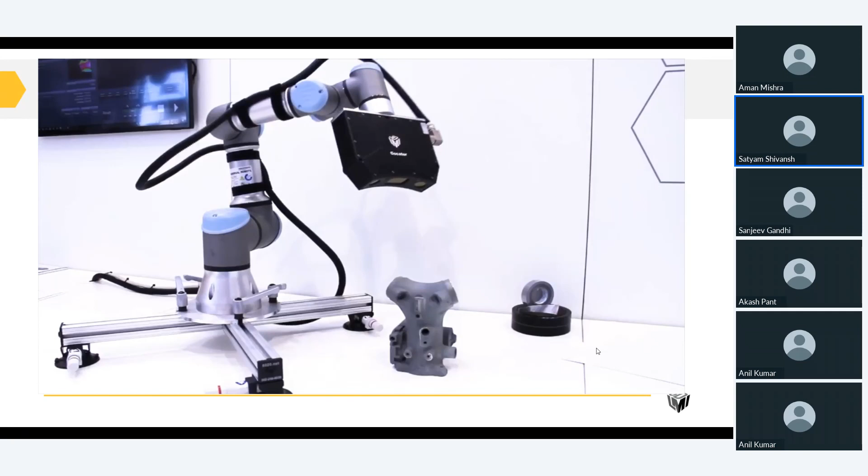As you have seen, the Gocator sensors are able to do gap and flush inspection directly inline when the car is in a moving condition, or on a BIW in the moving condition while mounted on a robot. This kind of application can be done.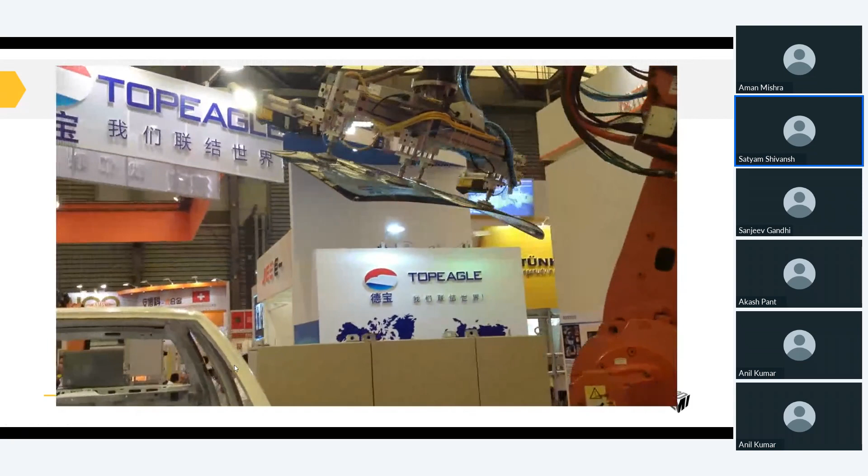Sorry, we are not able to hear the audio of this video. Is there any? No, it's not. No one speaking. It's just background noise. Okay, okay.

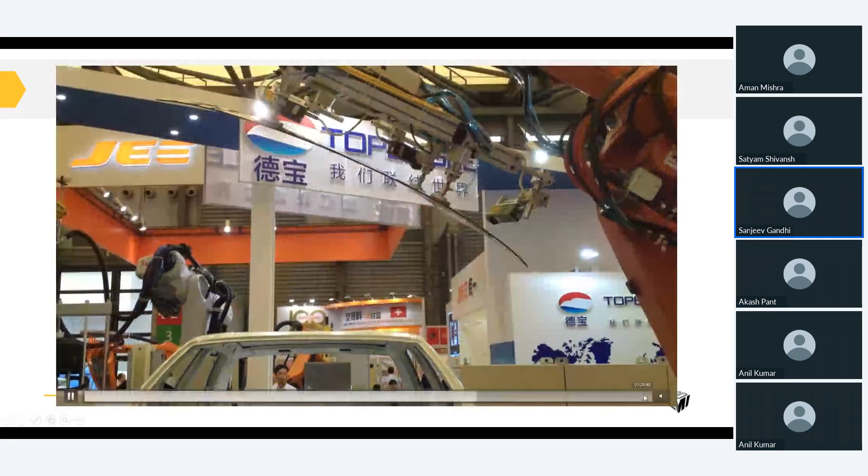So this is how you can see the robots are helping. Sensors are helping the robot for pick and place applications like this, and aligning these windshields, and the roof lining application can be happening.

Talking about next applications, like seam tracking, where sensor is guiding the robot along a particular path. You can see here, since the path is not straight and it is deviated, either we have to teach the robot all its positions for each individual part, or we can simply mount a sensor, and the sensor can give you all the coordinates required for the seam tracking application.

Like you can see, this is one of the integrators which has done this application.

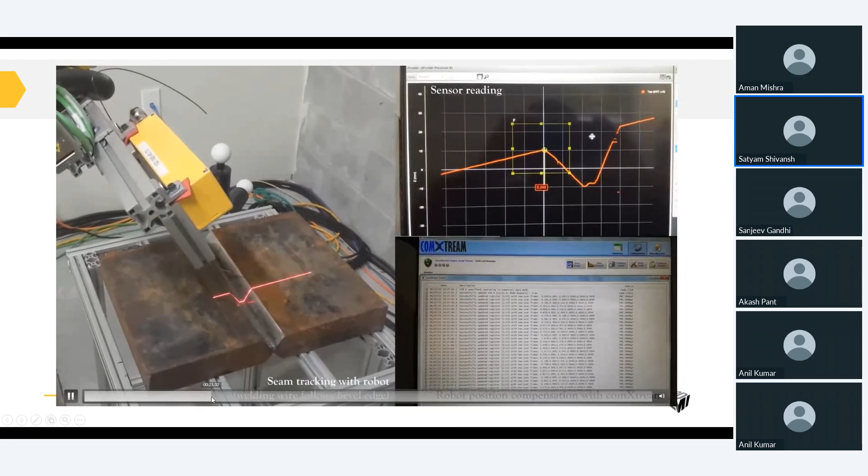Vertical motion without sensor feedback, now with the help of sensor feedback. This directly being guided. Horizontal motion with feedback, now you can see.

So this is how our sensors can help for the seam tracking applications, giving all the required feedback to the robot so that the welding can be done.

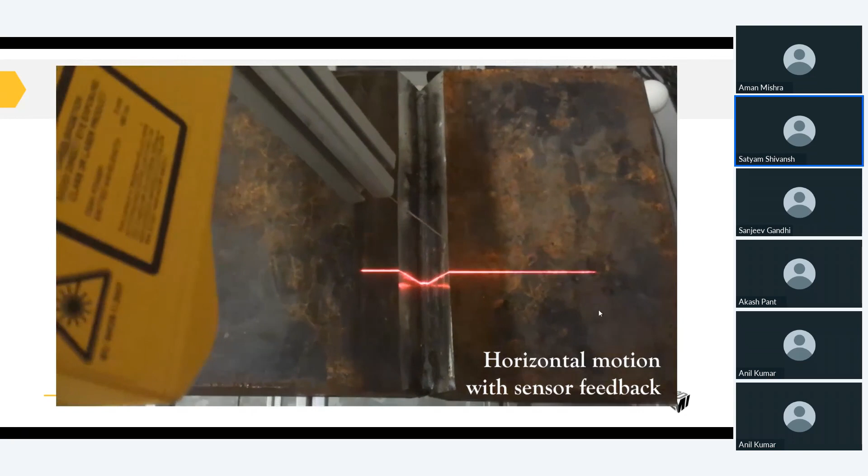Next is the volume checking application, where this is one of the major things the Gocator snapshot sensor is having. With the help of the snapshot sensor, we are able to check the volume of an engine block without the standard methods, which involve filling the block with oil or other lubricants so that it doesn't damage, and check the volume.

With an accuracy of plus minus 0.04 cm3, the sensor simply snaps an image, fills the complete image, and you can get the volume out of it. This is an exclusive tool which only the Gocator sensor is having. No other sensor has this tool, with the help of which we can do this application.

Going for the next industry, that is rubber and tire industry. In the rubber and tire industry, there are multiple applications where the sensor can be used, like thickness of the calendered rubber, embossing depth and the calendered rubber, width and thickness of the extruder, groove width, groove depth of the rubber extruder, tread extrusion profile checking, rubber plate inspection, and bulge dent on the runout of the tire. These are some of the applications where the sensor can be used.

Like in this, you can see different grooves and sheet widths are there. We can easily do this application with the sensors. Tire sidewall inspection for bulge and dent detection, checking the runout, peak to peak, and the harmonics. Here in this video, you can see we are doing the OCR and we are checking the runout also.

You can see two sensors are there. One sensor is doing the OCR on the sidewall of the tire. We are using the Gocator 2430 and the 2440 here. So one laser profile is here and one is here.

And the Gocator 2440. Here you can see the scan data and you can see the OCR which is being done here. This is the OCR, and this is a tread.

So in this, we can check the groove width, we can check the groove depth, we can check whether the shape of the groove is properly made or not, whether it is U-shaped or V-shaped.

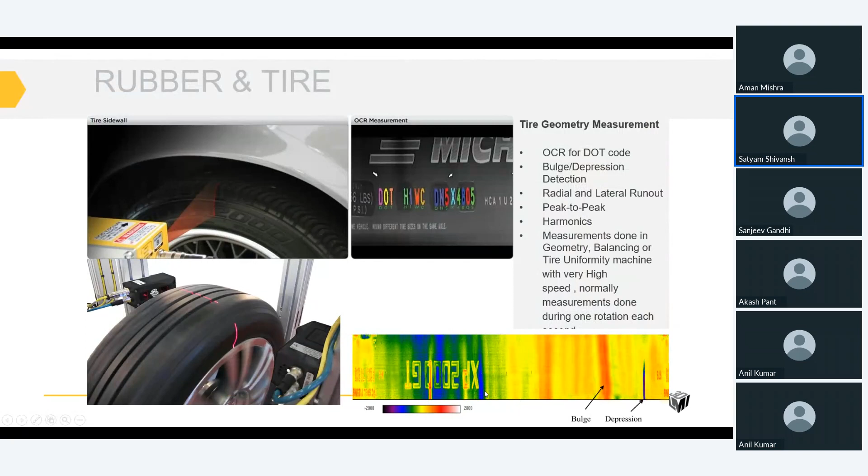You can see on the tire, we are doing the scanning, we are doing the OCR also. You can simply do all kinds of OCR applications with the help of the Gocator sensor. It can be alphanumeric code reading, DOT code, or DOT code OCR, all those things.

Talking about factory automation, where the sensor can be used for packaging applications, can check the seal integrity, whether it is being lifted up or not, whether it is properly flat or not, doing the filling inspection for opaque jars or opaque bottles, where the camera from the side cannot judge it.

Here you can see some of the major applications, like void filling application. Can measure the length, width, height, and location of multiple packages per second as they move down a conveyor belt. All of the measurements are made on the sensor using our browser-based interface. No separate software or programming required.

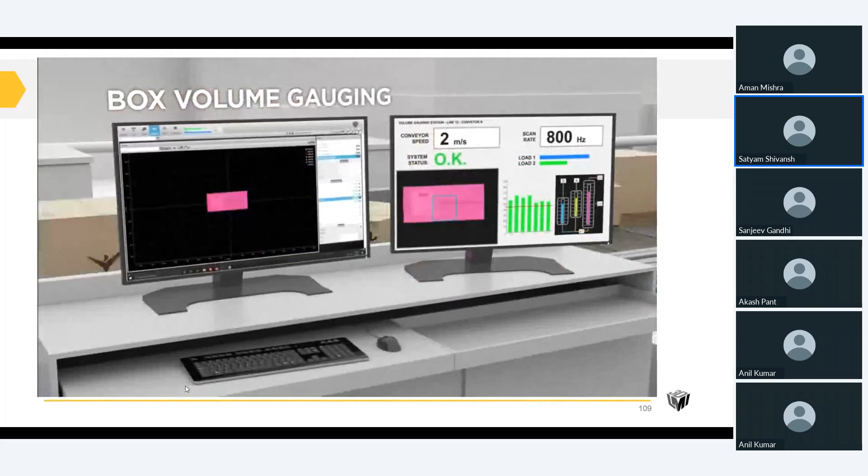Each of our sensors vary in measurement range and resolution, so it is important to pick the correct one for your application. The Gocator 2490 has a high enough resolution to measure not only the dimensions of a variety of parcel sizes, but even detects subtle defects in the packaging.

This inline inspection functionality allows a pass-fail decision to be triggered if a package with a defect is detected. LMI is also involved with a more advanced packaging application called void filling. Void filling involves scanning an open package with items in it and determining how much packaging material is required to fill the empty space. For this application, many sensors, including the 2490, can be used. However, the 2880, with its dual camera configuration, makes it the best choice to avoid occlusion within the box or tote on a single sensor.

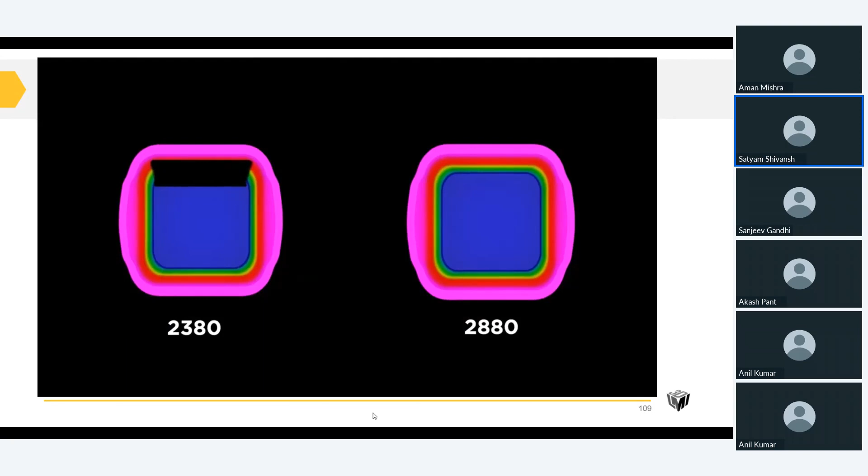A series of Gocator software tools are then used to acquire the volume of empty space within the box. Gocator 3D sensors are particularly useful in this application for their ability to scan irregular or high contrast objects in the package. This ability to scan irregular objects is also helpful for imaging the external surface of flexible plastic packages such as polybags, which companies are starting to use more of.

LMI sensors can be used at every stage of the shipping process. First, to measure and inspect objects prior to packaging. Second, to inspect objects when they're inside an open package. And third, to inspect and measure the closed package for shipping.

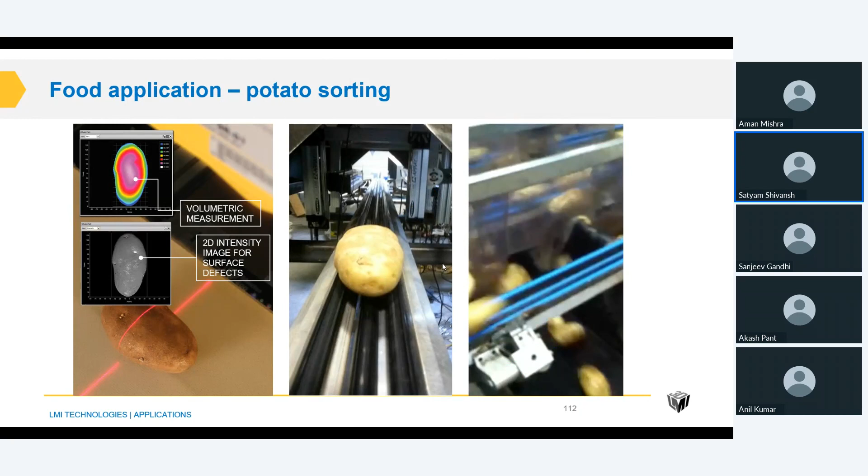This is more in the food industry, potato sorting, where we are checking the volume measurement of a particular potato according to the requirement needs. If it is not, then it is being thrown out.

For the metals, checking thickness of the sheets, these kind of applications: pipe diameter, pipe straightness, tooling shapes, steel plate alignment. Even for transportation, like road scanning, we have special infrared sensors for the road scanning application, checking road roughness, sag and hump, rutting, pavement edges. You can check the road for these things, texture also, roughness. This is how the sensors are being mounted here.

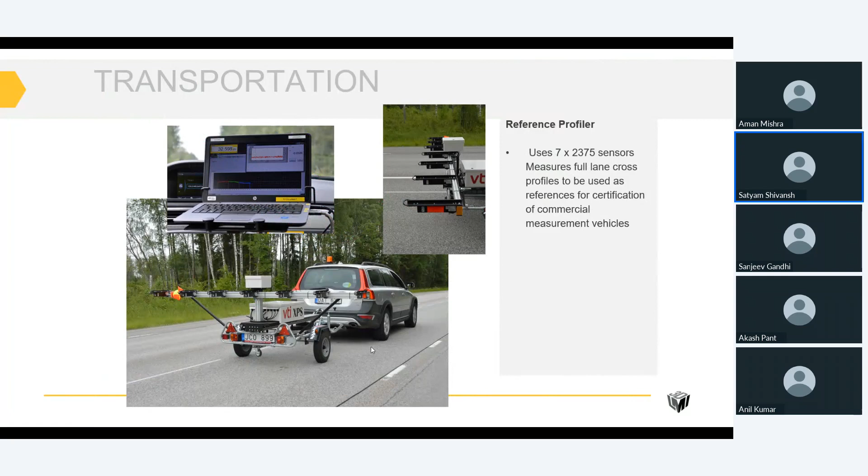You can see multiple sensors are mounted over here, using the 2375 sensor, using 7 sensors, full lane across, for the scanning of the actual cracks in the pavements on the roads. Even the rails, tram wheel alignment also, this is also being inspected for that.

For transportation, monitoring pantographs, checking the sheet with non-contact, high speed and high accuracy. Even the railway tracks also, for checking proper tracks, whether there are any kind of defects, what is the angle, what all the things are there. All these things can be done.

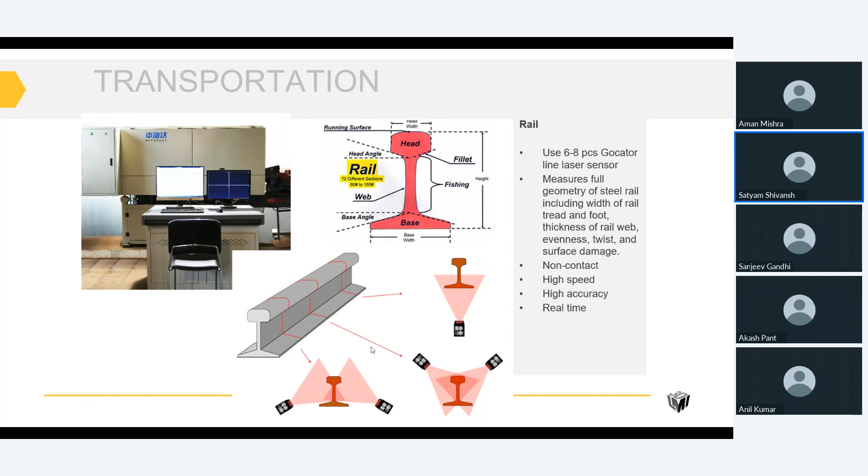Full steel rail: width, thickness, evenness, twist, surface damage, all those things. Some of the other applications out there: doing part inspection, height measurements, finding out the irregularities on that. So this was all about the 3D sensors and how we can help in multiple industries with the help of 3D sensors.

Now Akash, I can guess we can start the QA sessions. Yeah, so Satyam, we have one question from Mr. Gokul. He would like to know the scanning speed when we mount the scanner on a robot flange. In robot configuration, he also wants to know, does the SDK is enough for making path offset after inspection?

Okay sir, talking about the scanning speed, we are having two categories of sensors. One sensor can run at a high speed of 5,000 profiles per second, and the second with a scanning speed of 10,000 profiles per second. According to the need and requirement, doing the settings, we can run at a very high speed also. That is not an issue regarding the speed.